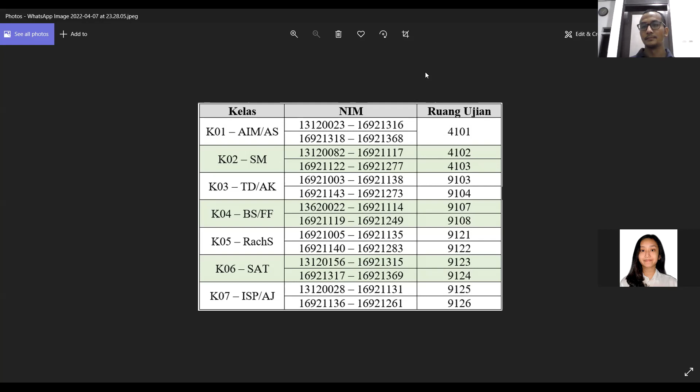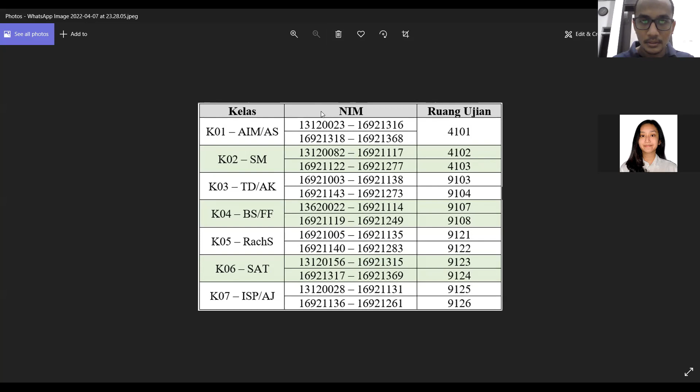Any question here? No? Anna Maria Phoebe. Hello, Anna Maria. Yes, sir. Seems like you contacted me yesterday, but I haven't read your message yet.

Tested positive or what? Yeah, I was positive 10 days ago, and yesterday I checked again, but it's still positive. I see. Okay, for your case, right?

Just wait and see. For your case, if there is no online exam, okay, so maybe you will have to attend the follow-up exam, okay. But just prepare for the online exam because there is a possibility that we have an online exam just for those who tested positive COVID. Okay, Anna Maria? Okay, sir. Thank you, sir.

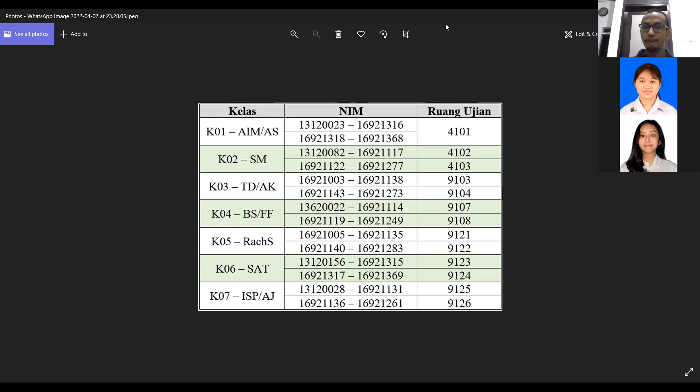Okay, I think that's all. Then for the exam, please prepare your best. For today, the discussion is mostly about preparation for the exam. I think I will use the time until 8:30 in the morning to discuss all the exam problems. But it's up to you guys, if there is no question about the problem that I sent to you via your class leader, and posted online in Edunex, okay? If you have any problem with that, then we will discuss it.

Okay, let's discuss about it. I believe most of you already checked this file. So basically, from the last 5 years, I took all of this problem, and most of the second midterm exam only has 2 problems.

The first problem is about machines, and the second problem is about internal force and moment in combination with frame. So you can expect more or less like that. But there is also a possibility of 3 problems, and if we have 3 problems in the exam, most likely it will be a dedicated frame problem, a dedicated machine problem, and a dedicated internal force and moment problem.

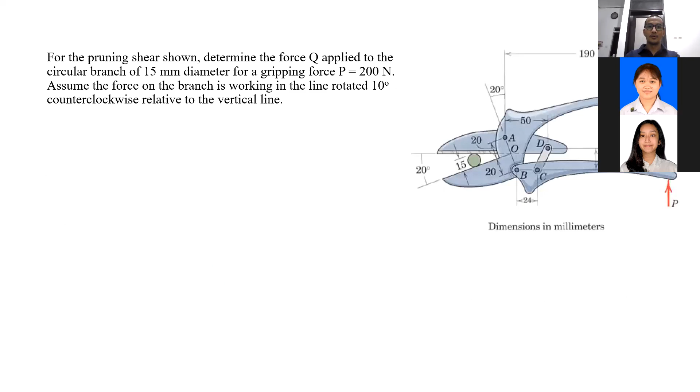But most likely we only have 2 problems: a dedicated machine problem and a combination between internal force and moment and frame. So it's a frame problem, but you have to find out the internal force in one particular beam in the frame, like this. This is some example of the frame problem.

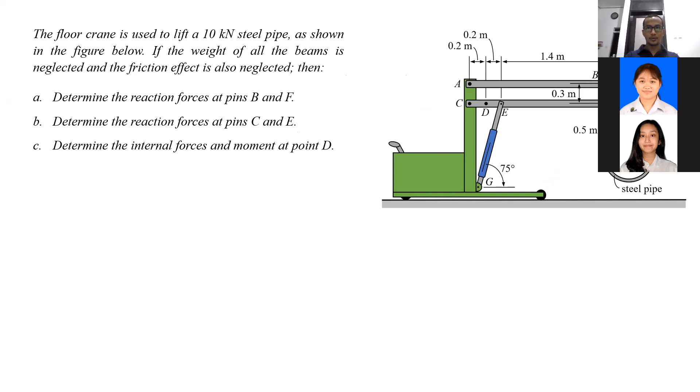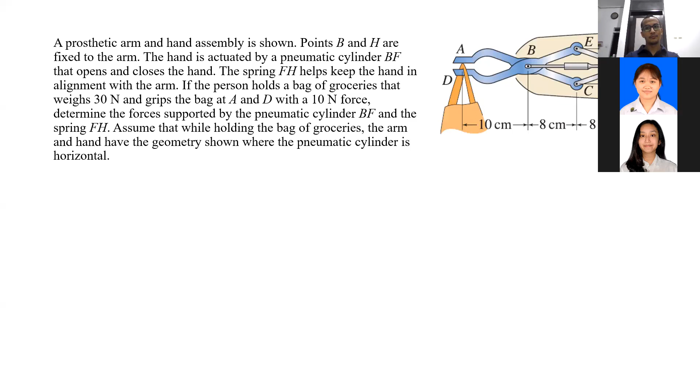In the previous exam problems, I believe this is the problem from me for last year's exam for machine, and this is one of the problems. This one I'm not sure, maybe it's 2 or 3 years ago. This one maybe 3 or 4 years ago. This as well, this, and this one.

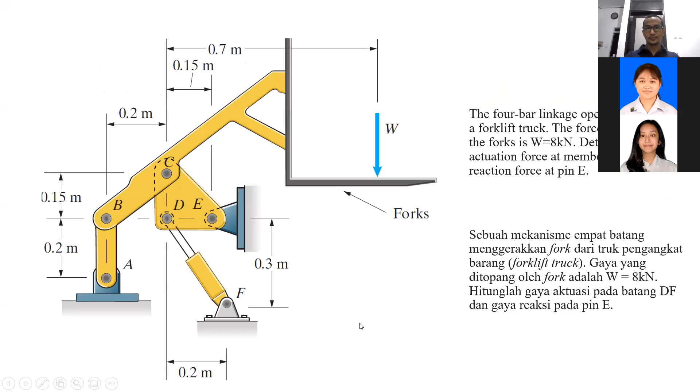Some of the problems I found interesting, and maybe we can discuss them in class. This is some of the internal force and moment in the frame, so combination between internal force and moment, and as well as the frame. You have to find out the internal force and internal moment in the frame, in one of the beams in the frame.

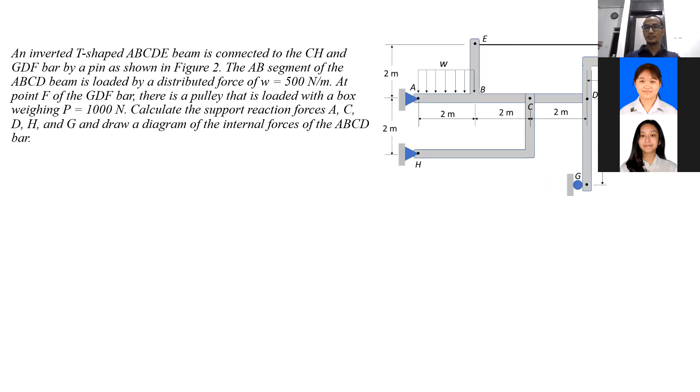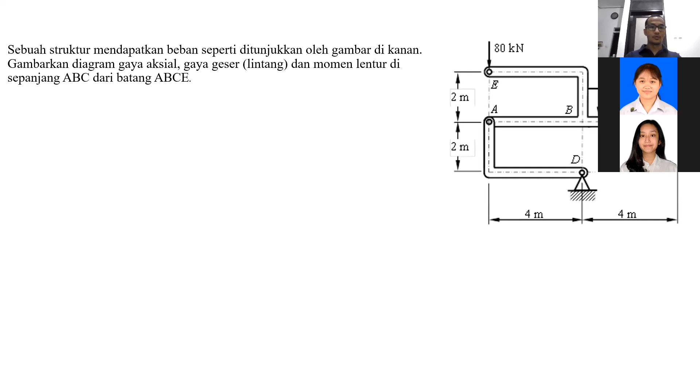You can see this is some of those cases, this as well, this as well, this. I already discussed this yesterday because I gave it as your homework problem, so I will not discuss this again. This as well. Okay, any of you have any problem with those problems?

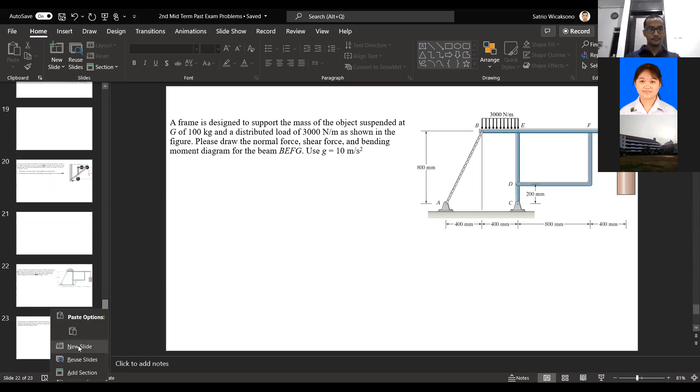Excuse me sir, I have a question. Who's this? William, sir. Okay William, which problem? It's not exactly a problem. I just want to ask, what if we encounter any statically indeterminate question? Statically indeterminate? Yeah, just solve it then.

So basically in the frame, especially in the frame and in the machine problem, if you encounter the statically indeterminate problem, the first thing, as usual, because it's frame and machine, always start with finding the two force member. Because by doing so, you can simplify the case. Okay William?

Then after that, you go for the multi-force member and try to solve each of those multi-force members. Okay William, and most likely it will add up, it will be the same. The number of the unknowns and the number of the equations that you have, normally it will be the same.

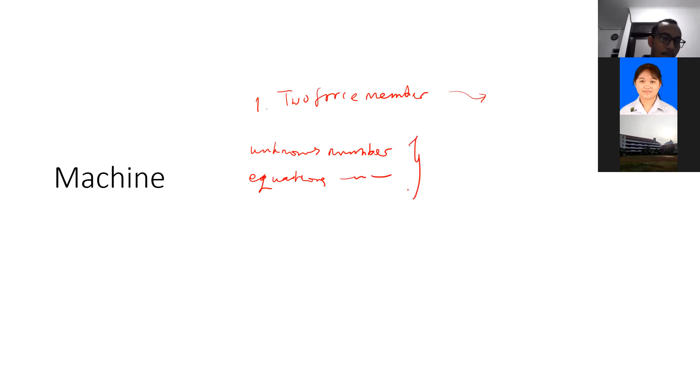Okay, for some of this problem, yes, if you take a look only at one of the beams, most likely for some of those cases, the number of equations that you have won't be enough. But if you combine it with the other beams, most likely it will be enough. Do you get it, William?

So there always have an answer, so there won't be any indeterminate situation. If you total all the equations and the number of unknowns for frame and machine, most likely it will be the same, because if not, we will not be able to solve it.

But some of you may be a bit nervous if you found out that, okay, for example, this is one of the problems and we are asked here, wait a minute, internal force at point D. Okay, if you know from the beginning you are asked to find out the internal force at point D, it means we have to concentrate on this member only, right, William?

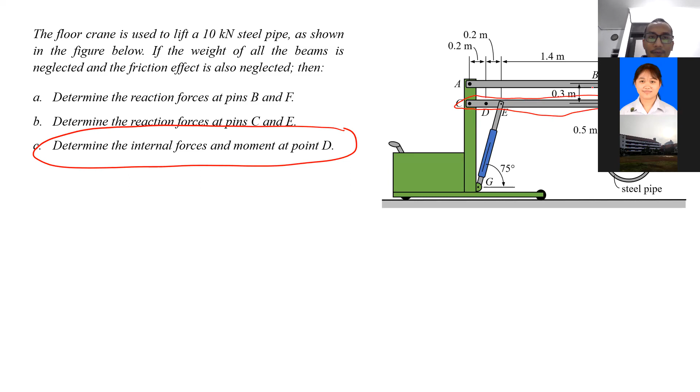Yes, because by concentrating on that, we will be able to solve for internal force at point D. But if we just take a look directly at that particular member, if you have tried it, right? As usual, we will start to analyze the two force member. Do we have two force member here?

Yes, G and E. G and E, what else? There is one more. Is it CF and AB? C? Sorry, CF. Oh, CF is not possible. Why? CF is not two force member because there is a GE, a pin. Oh yeah, sorry, AB is a two force member. You are correct, AB is two force member, but CF is not.

The way to differentiate a two force member from the others is very simple. As long as the member only has a pin joint at both ends, it must be a two force member, regardless of the shape of the beam. It can be straight, it can be curving, it can be 90 degrees. Okay William? Yes sir.

So we have two force members, so we can simplify the case. We can replace AB with a force in the direction of AB, and GE with a force in the direction of GE. So here we have GE, F_GE. What else at C? What should we have at C, William? The reaction forces. At C here, yes? CY and CX. Okay correct, CX, and FX and FY on the right side. Correct, yeah, FX, FY.

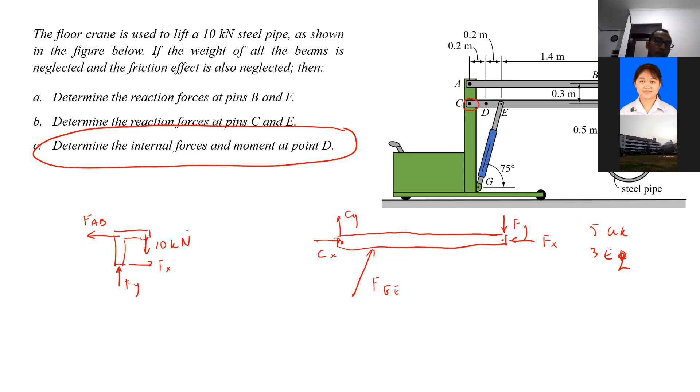So this is it. For this particular free body diagram, can we solve it? Yes, we can solve it. After we solve that, what happens to the other free body diagram? We now know the reaction force on F. Yes, right. We know this too. Now, in the second free body diagram, we are only left with 3 unknowns. 1, 2, 3, right? So now it's solvable. It's always like that. Okay, William? Okay, thank you, sir.

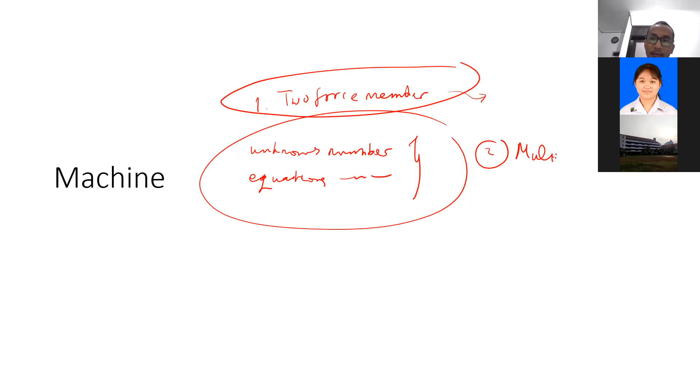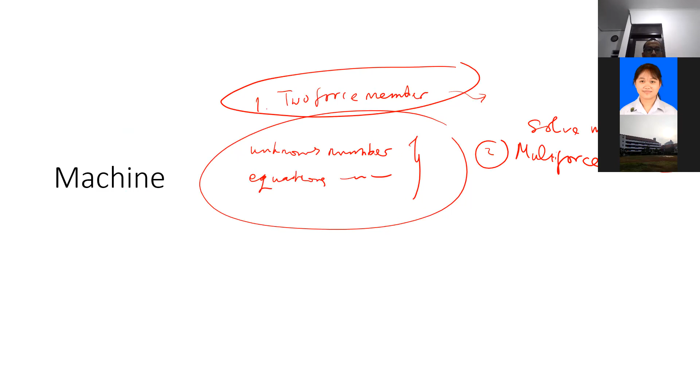So as usual, for the machine and frame problem, start with finding the two-force member. And then after that, most of the time, you have to solve all or most of the multi-force members. Sometimes you have to solve all of the multi-force members. In this case, you solve all of the multi-force members. We only have 2 multi-force members, this and this. So that's always the sequence.

So for the frame and machine problem, it's quite simple. Find the two-force member, replace the two-force member with a force in the same direction as the member, then find the multi-force members and solve them one by one. If you cannot solve them one by one, take a look at the number of equations and number of unknowns in total, so you can solve them together. This particular problem is quite simple because using the first free body diagram, you can solve for all the unknowns directly using the 3 equations you have. Then you can go to the second free body diagram to solve for the rest.

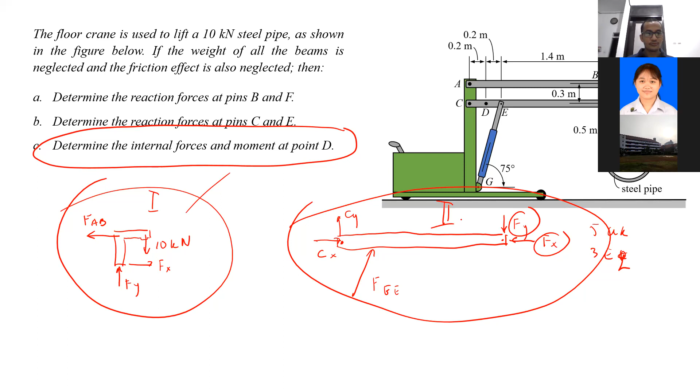But sometimes, in some cases, we cannot do that. We don't have this flexibility. Sometimes in the first free body diagram, you have 4 unknowns, which you cannot solve. In the second free body diagram, you have 4 unknowns as well, which you cannot solve. But when you join both together, you have 6 unknowns and 6 equations, which you can solve. But you have to solve both free body diagrams together. Do you get it, William? Yes, I get it, sir.

So don't always expect this kind of problem, which you can solve one by one. Sometimes you have to look at all the free body diagrams, list out all the unknowns, list out all the equations, and solve them together. Because most likely, if you draw the free body diagrams correctly, the number of unknowns and the number of equations will match up, and we can solve it. For this particular problem, is there any question? No?

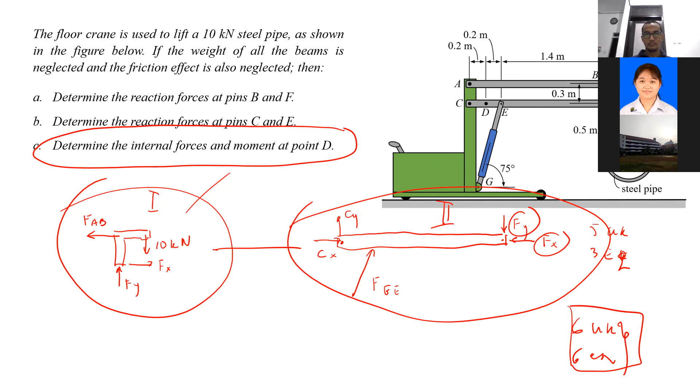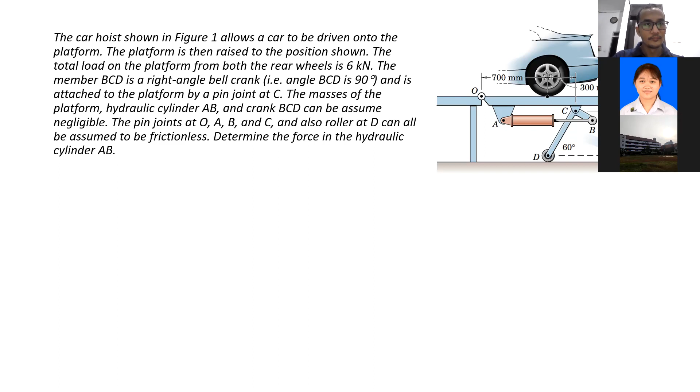This is the second problem. This one is a car hoist, a mechanism to lift the car. There is one member BCD, and there is an actuator AB. The one in question is the force at the cylinder AB. Force at cylinder AB. So in this case,

Ali Riyadi. Hello, Ali. What do you think about this? Can you help me find the two-force member first, as usual? Yes, sir. Which one is the two-force member? It is AB, sir. AB, correct. We only have one here. AB is the two-force member, so we can replace AB with a force in the direction of AB.

Besides AB, what else do we have? We have member AC, which is not a two-force member, and member BCD, which is not a two-force member either. So as usual, you can draw the free body diagram of member BCD, and the free body diagram of member AC as well. Here, I think I will take a look at the free body diagram of member AC.

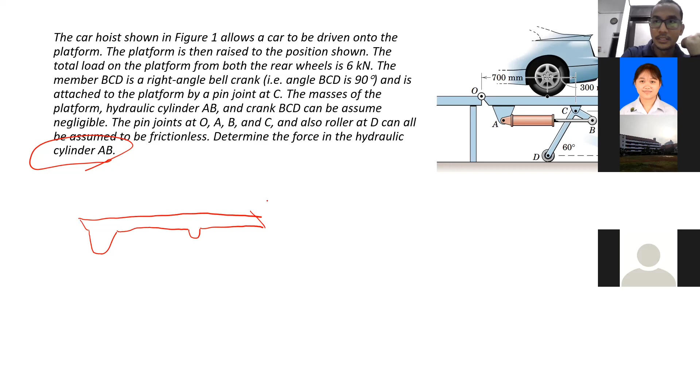Ali Riyadi, for this particular member, AC, what forces do we have there? We have CB, sir. BC. BC? What do you mean by BC? This one, AB, is it right, sir? Oh, that one. Oh, we have the car. The weight of the car. The weight of the car, correct. 6 kilonewton here. What else?

OA. At O. OA, yes. What do you mean by OA? At O here, there is a hinge. So it's supposed to be OX and OY. Oh, yes. At A, what do you have at A and what do you have at C? Also a pin, sir. At O is a pin, at A is a pin, at C is a pin. But remember, at A there is a two-force member, right? Yes, so FAC.

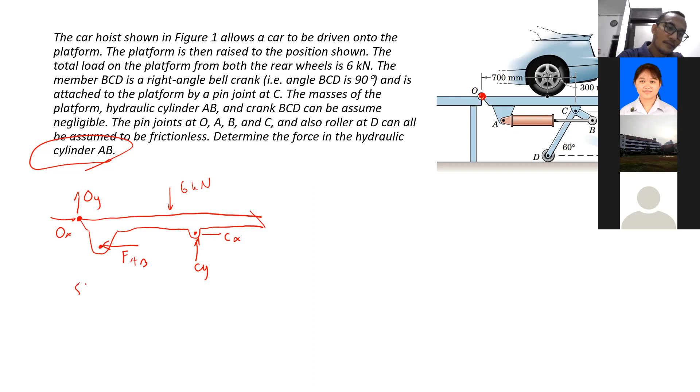FAC. AC or AB? AB. Okay. So we have a two-force member. This one is FAB, and then at C here, CX and CY. How many unknowns do we have here? 5, right? We have 5 unknowns and only 3 equations. Okay, this one is not solvable directly, but now let's take a look at the other free body diagram, the member BCD.

Okay, we have at C, at B, and here. At B there, what forces do we have? FAB, correct. This one, FAB. What else? At C, CY, CX. Supposed to be the opposite of what you drew in the previous one, because it's action and reaction, okay? And then at D, it's a roller. DY.

Okay, now let's take a look at this. How many unknowns here in the second free body diagram? 4, sir. 4 unknowns, 3 equations. Cannot be solved as well. But now I want you to check the whole system. Both free body diagrams, this and this, how many unknowns in total? 9, sir. 9, are you sure? Let's take a look. Don't just add them up like that.

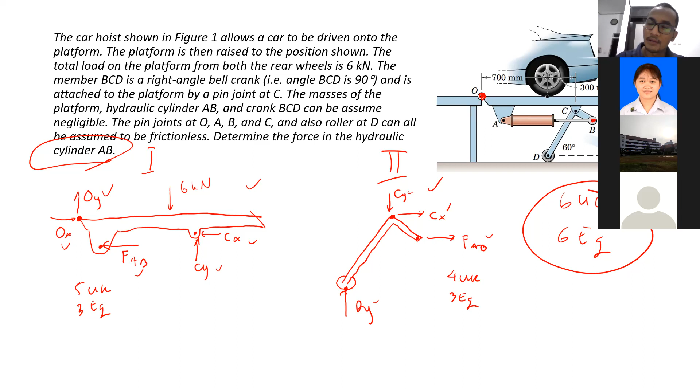Okay, William, did you get it? Yes, I understand. It looks like a statically indeterminate case, but if we take a look in total, the number of equations will be the same as the number of unknowns. So for this one, it's just mathematics. You have 6 equations and 6 unknowns. For this problem, I believe I already gave it to you in the homework. If you still don't understand how to solve this, please watch the video discussion on this homework.

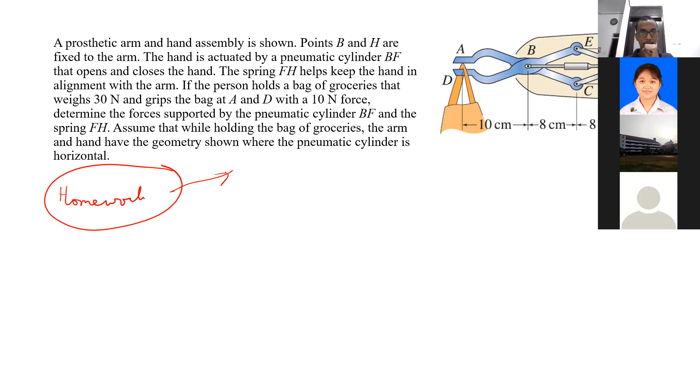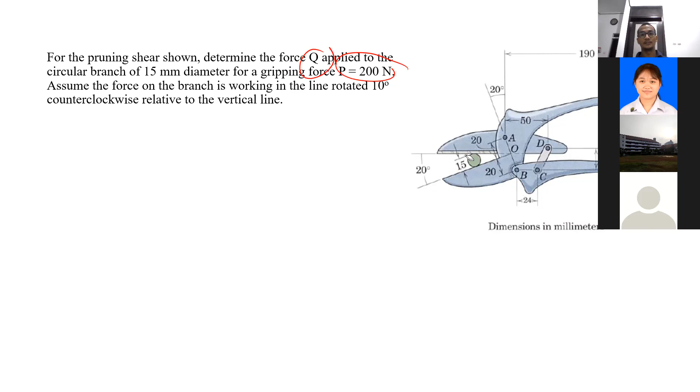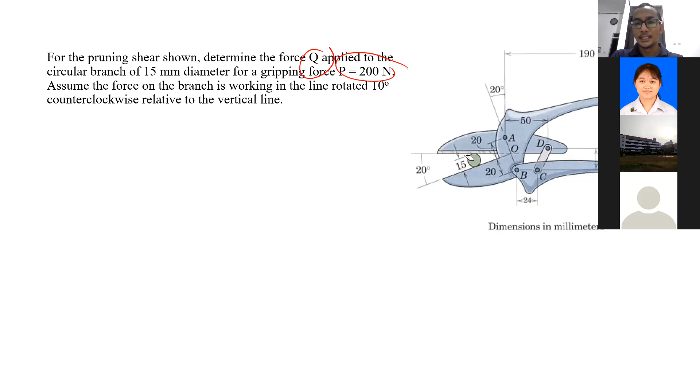For this particular case, the gripping force is 200 Newton, and we are asked to find the force Q applied to the circular branch. Anyone having a problem with this? Although it's not exactly the same, in the homework before I already gave a quite similar problem. So I believe you will be okay solving it, although for this one the geometry is slightly difficult.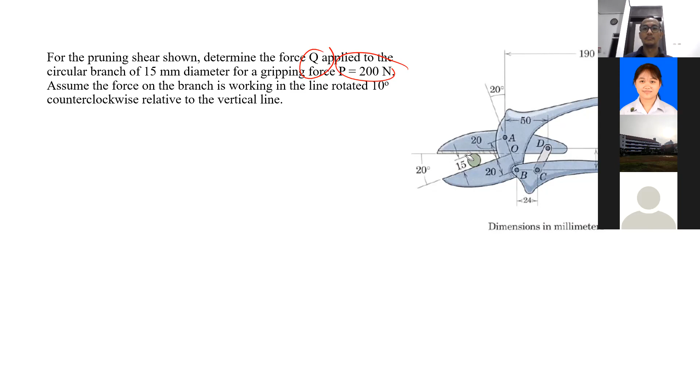Okay, let me discuss it together. What's this? Davi Rizky. Hello, Davi. Davi is not there. In that case, Audrey Vanita. Hello, Audrey.

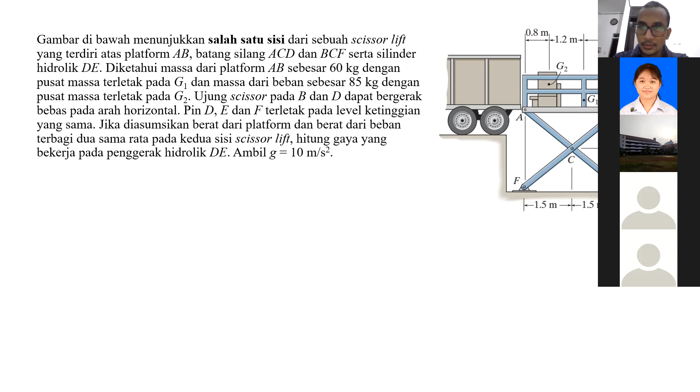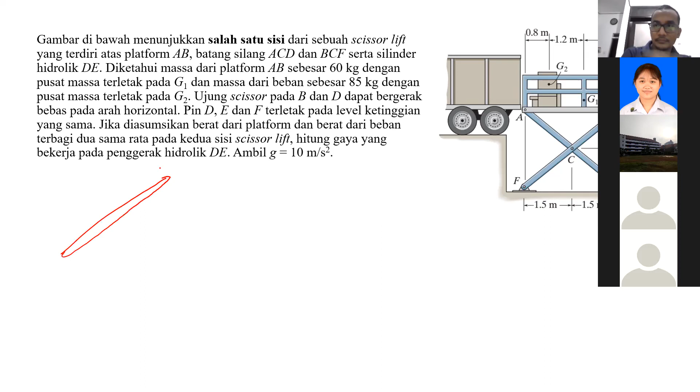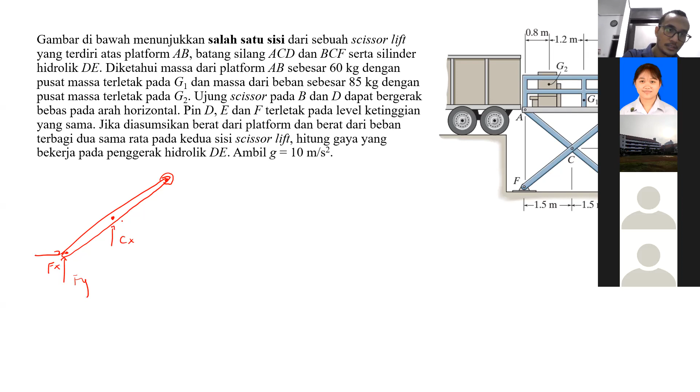I first want to take a look at FCB. What forces do we have at FCB? F, C, and B. There is a roller here. There's FX and FY. And then CX and CY. What else? And BY. Okay, so we have 5 unknowns, 3 equations. We cannot solve it, right?

And now let's take a look at ACD. What do you have there? There's AX and AY. What else? CX and CY, but the other way. Opposite. Yes. And a roller there, right? So it's supposed to be DY, right? Yeah, DY, but remember there is DE there, so there must be FDE there. In this case, we have 6 unknowns and 3 equations. We cannot solve it as well.

The last one, the top box, the part where we put the boxes. There is B here, A here. At G1 60 kilogram, at G2 85 kilogram. So what forces do we have in this part? There's AX and AY, so it's supposed to be the opposite direction. I will just replace the direction. What else? And then there's BY. And then G2 and G1. G1 60 kilogram, so using g equals 10, 600 Newton, right? And this one is 850 Newton.

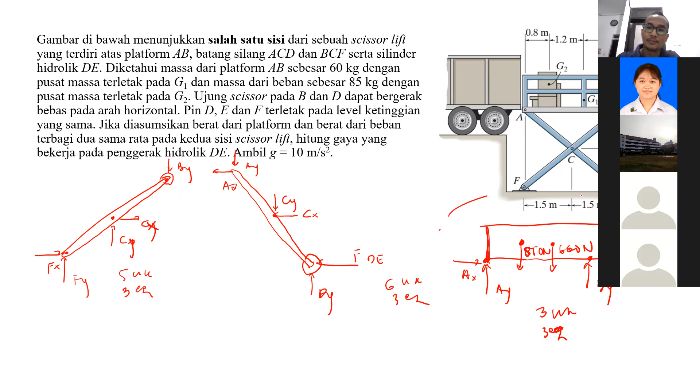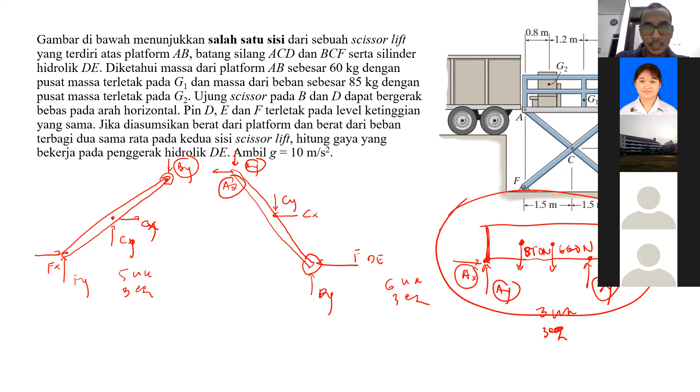For this particular problem, we have 3 unknowns and 3 equations, right? Can we solve this one? Yes, we can. So we start with the one that we can solve. In that case, we found out AX, AY, and BY. So these 3 are solved. Now we are left with 4 unknowns here, and 4 unknowns here as well, right?

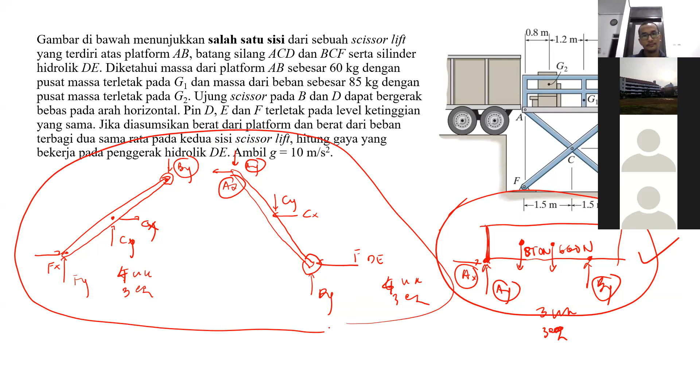Yes, sir. Okay, but now from these two free body diagrams, how many unknowns are left in total? CX, CY are not yet solved. FX, FY are not yet solved. DY is not yet solved. FDE is not yet solved. So in total we have 6, right? And 6 equations as well in total: 3 from this, 3 from this, so we can solve it together. But of course, you have to join the equations from both free body diagrams. Do you get it, Audrey? Yeah, I think so, sir. The calculation will be long, but it's solvable. Okay, sir. Good.

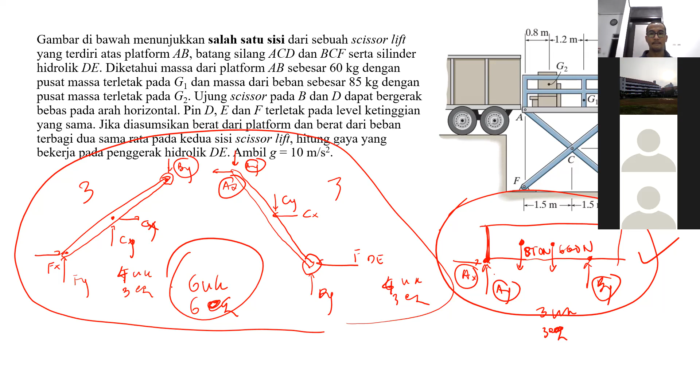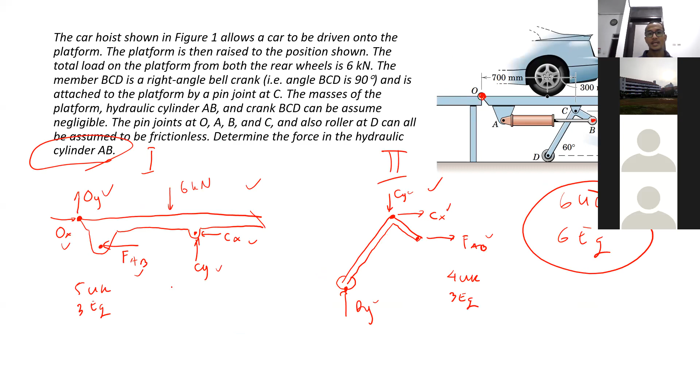So that's the way to solve this one. Try to take a look which part is a two-force member. Replace the two-force member with a force in the same direction as the member. Then disassemble all the multi-force members, and after that you can solve for the multi-force members one by one. Sometimes it's even possible to solve the whole free body diagram to find the external forces, but sometimes it's not necessary. Just disassembling everything and solving the multi-force member free body diagrams one by one is supposed to be enough.

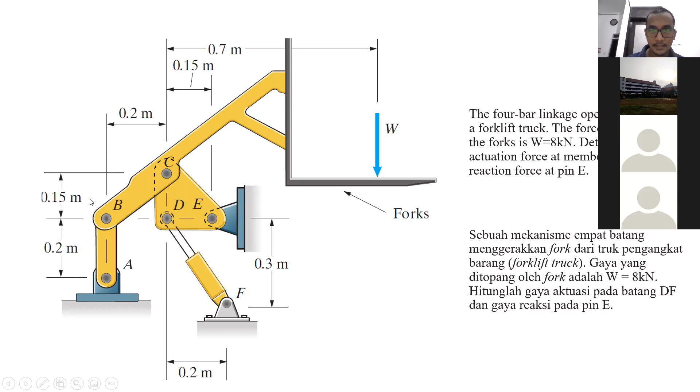This is an interesting case as well. This one is about a fork. To be honest with you guys, this is one of the problems that I prepared for the exam tomorrow. But unfortunately, it's already been discussed in the other class, so there is no use in using this problem in the exam anymore. We will not use it in the exam, but we can discuss it in class. Now, let's see.

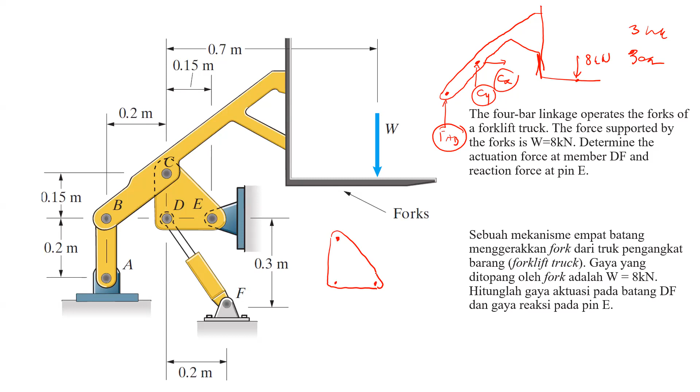If we take a look at CDE, it's like a triangle like this. At C, at D, and at E. What do you have at C? CX and CY, right? But it's supposed to be the opposite, okay? What else? The force FDF at D. FDF. And at E? EX and EY. Okay. How many unknowns do we have here?

5. But we already solved for this, right? Yes. So we are left with 3 unknowns and 3 equations. Can we solve this? Yes, we can. So this one is as simple as that, as long as you solve for the BC and the fork first. Okay. So actually, frame and machine problems are mostly like that.

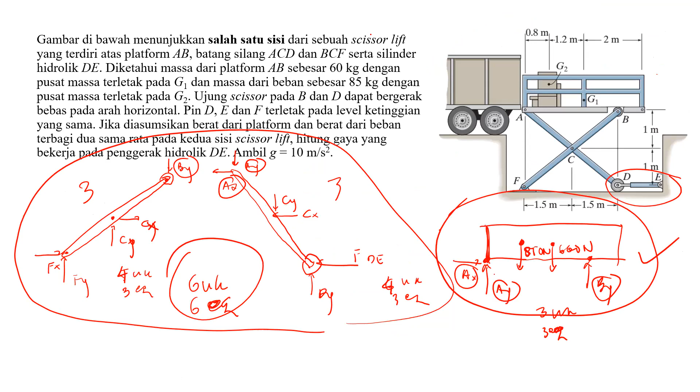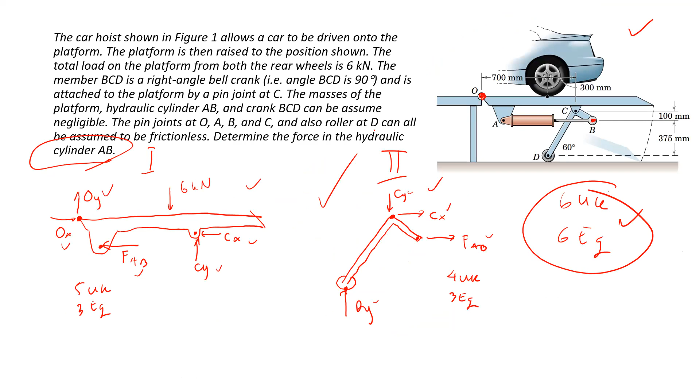You can solve the unknowns one by one. So try to find the multi-force member free body diagram that has only 3 unknowns. Solve it first, and then go to the other, which you can solve after that. Sometimes that's the case. It's the easy case, but sometimes there is a difficult case where you have to combine the equations from one free body diagram with the equations of the other free body diagram to solve the problem, like this one. And this one as well. But it's not supposed to be a big problem because it's still solvable.

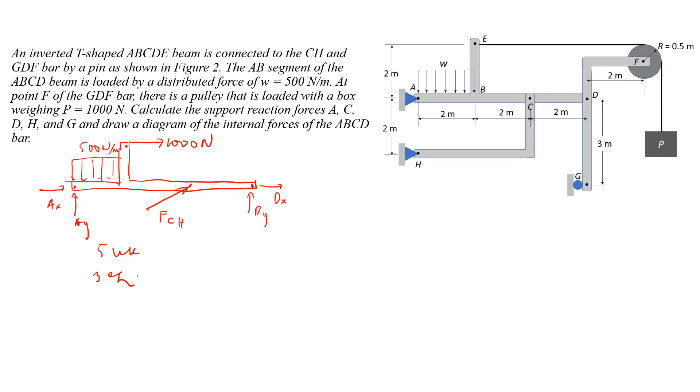Let's take a look at this. Remember this one, GDF. At G, what forces do we have? GX only, correct? And at D, it was DX, DY, but the opposite of the one that we drew before. Although most likely the direction is wrong, so I will just revise this. Then at F, FX and FY. The problem now, we have 5 unknowns and only 3 equations here.

But if we take a look at the pulley, we're supposed to get the Fx and Fy, right? Now we take a look at the pulley first. This is the pulley, and we have Fy and Fx here. What else do we have in the pulley? The radius, 0.5 meters. How about the tension force? The tension is the same as P, 1 kilonewton. But which way is it going? Downward, to the load. And there is another tension to E, 1 kilonewton.

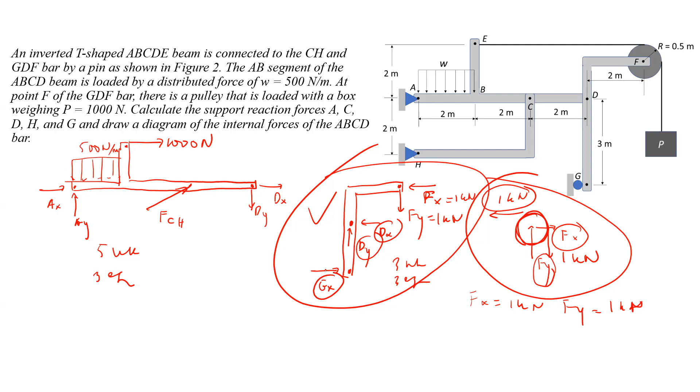Now how many unknowns do we have here? 3. We have 3 unknowns and 3 equations, so we can solve this: DX, DY, GX will be solved. Then we can go for the first free body diagram. DX, DY are solved from the previous free body diagram. How many unknowns are left here? 3 unknowns, so we can solve this as well. After solving that, you can try to draw the internal force and internal moment diagram of A, B, C, D. So it can be solved right now.

Now, to draw the diagram, how many cuts do we need here? 3 cuts. Correct, we have 3 cuts. This is the first one, this is the second one, and this is the third one. If we take a look at the first cut, it will be like that. There will be a distributed force, 500 Newton per meter. We have AX, AY, but you know the value already. The internal force and moment that we have there is like what?

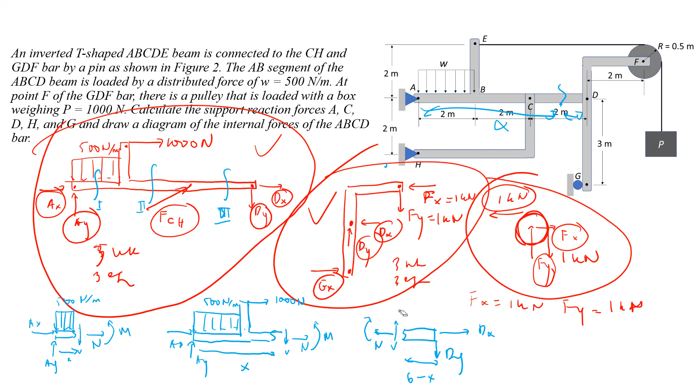This is some other example that we have. I think I will discuss this first.

Wait a minute. Neila, hello Neila. Neila, are you there, Neila? Neila Fatia? Why is your voice very... the volume is very small. Hello, Neila? Hello, sir. Now it's better.

As usual, we start to solve this problem. This problem asks you to find out the distribution here, BEFG. Because it's a frame problem, we always start with determining the two force member. Do we have a two force member here?

Hello, Neila? Hello, Neila? Hello, sir, do you have a two force member here? Sir, I'm sorry, but you're kind of breaking up, your voice. My voice is breaking up. Is it still breaking up? Hello, is it still breaking up? To me, yes, sir. Okay, I'm not sure, but Alberto, hello Alberto, is my voice breaking up, Alberto? No, sir, it's okay. Okay, in that case your connection seems to be the problem.

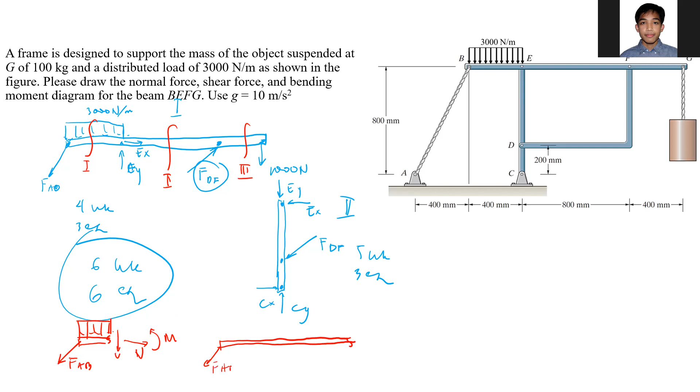Ini ada FAB, 3000 Newton per meter, terus ada EY, EX. Nah, di sini sama persis ya? Iya, Pak. Gaya dalamnya V, N, dan M.

Nah, kalau potongan terakhir lebih gampang ambil dari kanan. Apa aja itu? Shear force sama momen aja, Pak, karena normalnya nggak ada ya. Normalnya kita 0 di sini ya.

Cuman shear force-nya positif arah kemana nih? Ke atas. Oke, normal force-nya tetap saya gambar aja ya, cuman nanti nilainya akan 0. Momennya positif arah ke? Clockwise, Pak, supaya tersenyum seperti itu.

Ini kita bisa selesaikan. Kita gambar diagram internal normal force, shear force, and bending moment diagramnya. Seperti itu. Oke, makasih.

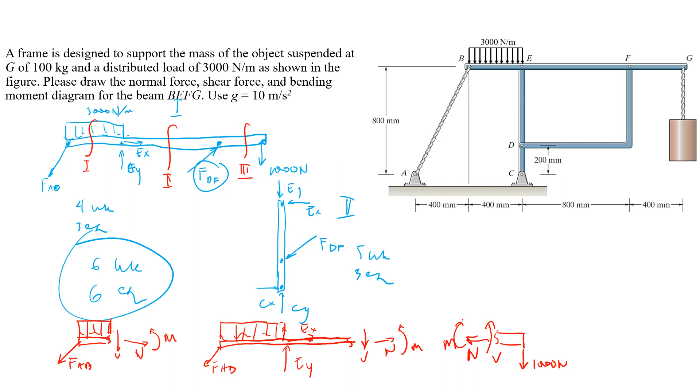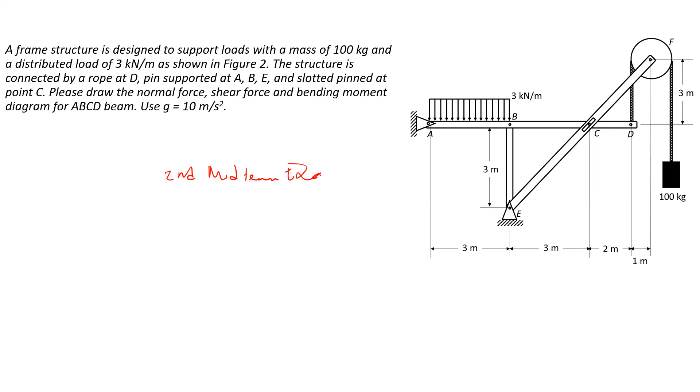Ini kasus-kasus lainnya, mungkin agak sedikit lebih complicated, tetapi bisa kalian gunakan untuk latihan. So basically, for your second midterm exam tomorrow, most likely the problem is frame and machine. One of the problem is frame and machine. The other problem is combination between frame and machine.

Combination between frame and internal force. But later for your final exam, the things that will be covered here is everything, and most likely internal force will be discussed as well. There will normally be a problem about internal force as well in the final exam. Besides that, we will cover new topics about friction in the final exam.

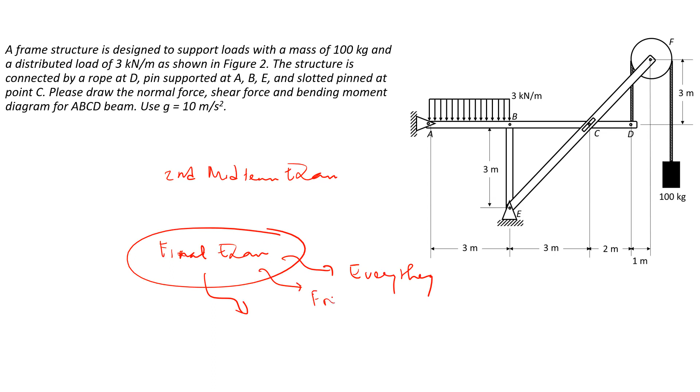You need to learn about how to handle the distributed force as well in the internal force and moment diagram, because it will be slightly more complicated if there is a distributed force.

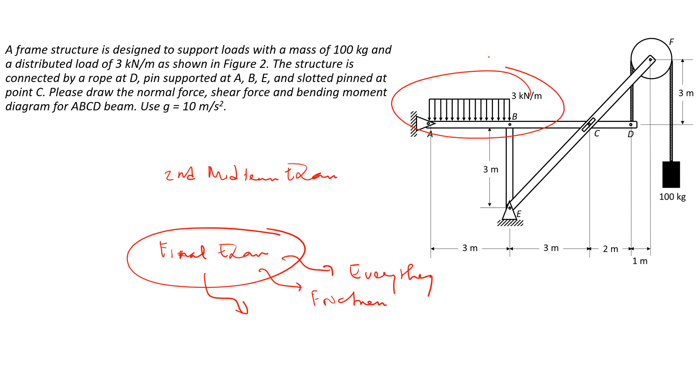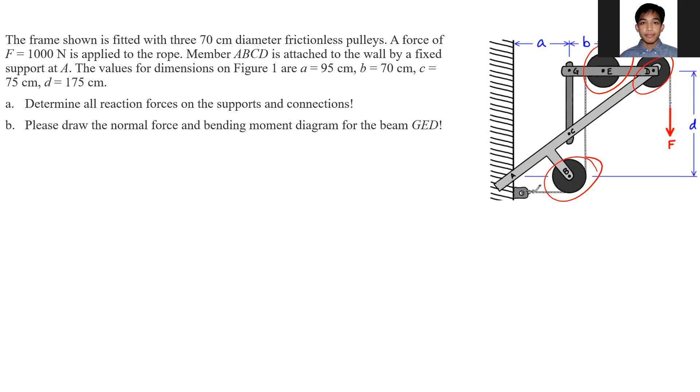Don't forget as well, if we have a pulley like this, we have to solve for the pulley, the force due to the pulley first. For example, we have to solve the pulley B, pulley E, and pulley D. At pulley D there is a force F downwards, which is 1000 Newton, and then there will be dy, dx, and there will be tension here, T1. Using sigma fx, sigma fy, and sigma moment.

Using sigma moment at D equal to 0, we will get T1 is equal to 1000 Newton. Then dx using sigma fx equal to 0, we will get dx equal to 1000 Newton. dy using sigma fy, we will get dy is equal to 1000 Newton. Like that.

Then the tension here is the same. We have tension 2, and then we have ex and ey. Using sigma fx, sigma moment at E, we get T2; sigma fx equal to 0, we get ex; sigma fy equal to 0, we get ey.

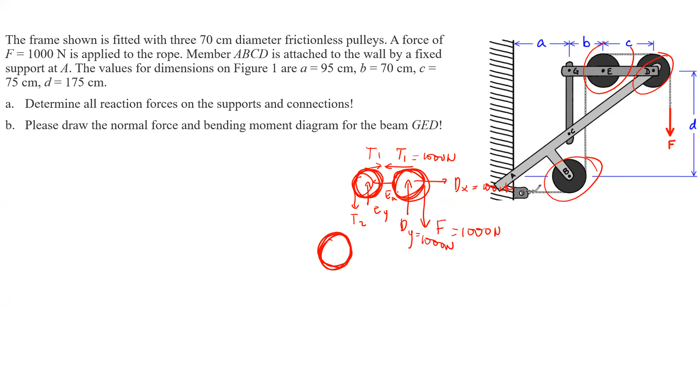Everything I believe will be 1000. So here is T2, we have T3 here, and then we have By, we have Bx. Same, using sigma moment at T3 we get it, 1000. Sigma fx equal to 0, we get Bx equal to 1000. Sigma fy equal to 0, we get By 1000.

Now, after we get all the reaction forces at the pin, Bx, By, Ex, Ey, Dx, Dy, we can move the force to the frame. If we take a look at member ACD, there will be a force due to dx, T1 there, due to dx, dy there. So we can move it there.

At E there will be Ex, Ey, we will put it there. At B there will be Bx, By, we will put it there. But don't forget, you have to solve for this one first before solving for GED and ACD. GC here is a two-force member. Besides that, it's a multi-force member.

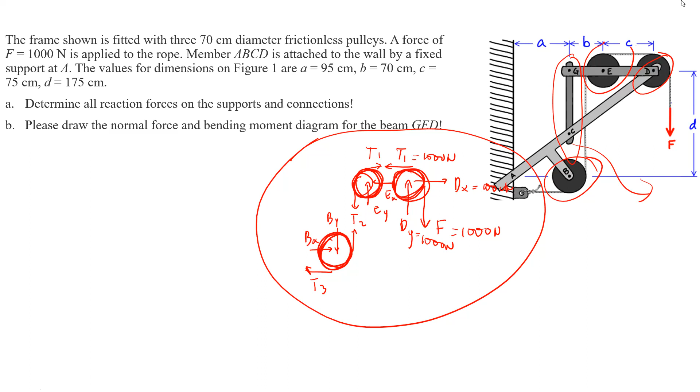Sir, I'd like to ask about the exam tomorrow. Will there be any rules for rounding up numbers? Sorry, rounding up what? Who's this? Oh, Rafi, sir. I'd like to ask, will there be any rules for significant figures? I think it's better for you to get at least 3 decimal points, 3 behind the decimal, so the calculation won't be that off from the calculator. Okay, sir, thank you, sir.